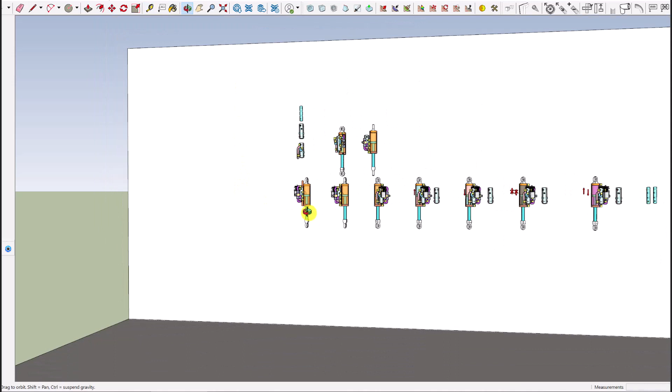This is the valve. This valve is very important because it allows creation of a hydraulic cylinder based robot, remembering that this is a hydraulic cylinder. Most people would call this a piston, but actually that's the piston, that's the hydraulic cylinder.

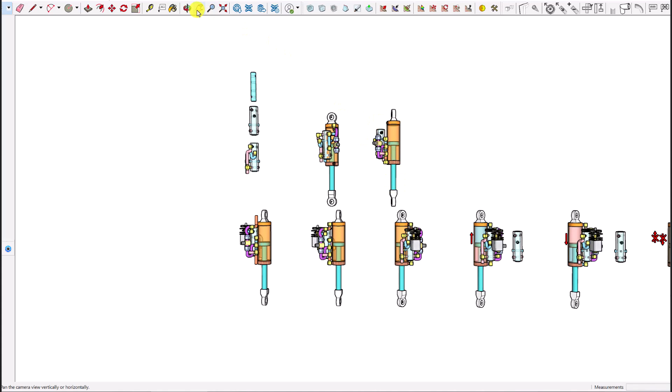I'm showing you this in SketchUp, and over here is the robot. The robot is created using hydraulic cylinders, and we went down here and looked at the hydraulic cylinder that controls dorsiflexion and plantar flexion of the foot. And here's the little valve that I put in there.

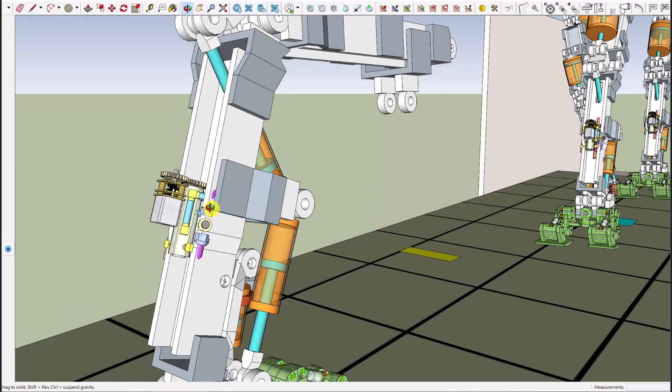Again, this valve makes possible robots based on hydraulic cylinders, which are a much better robot if you want to make a humanoid robot. The articulations are better, the stability is better, the strength is better, the way it mimics a human being is better. It's just better. It hasn't been done because no one has quite figured out how to do it yet,

but I think I'm getting there. All right, let's look at the valve.

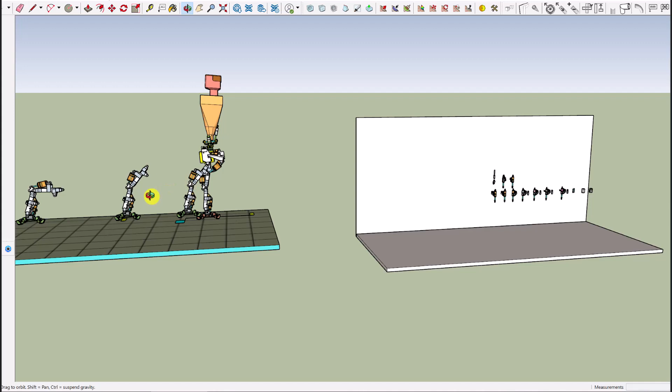What you want to do with this valve is allow you to make the hydraulic cylinder extend and retract itself. So we'll take a look at this. We'll zoom down and we'll get just this part right here.

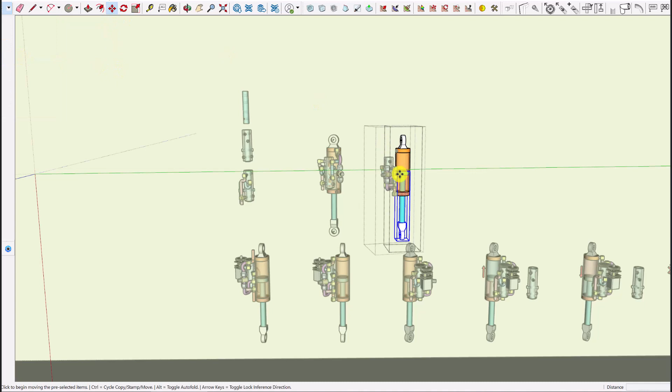And this is retraction of the piston and the connecting rod, and that's extension of the piston and connecting rod. And that's what we're talking about. We've got to be able to get this structure to do that.

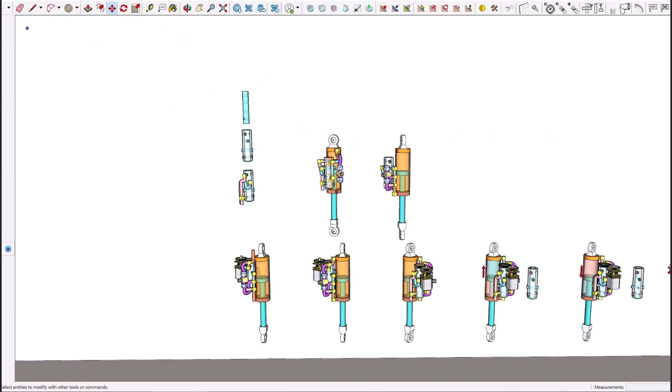The way that hydraulic cylinders work is if you put pressure up here in this chamber, I call this the upper chamber. It's only upper because this hydraulic cylinder is up and down. There's always this chamber and then there's the other chamber.

But if you put pressure here and you allow fluid to come out of here, then this piston will go that way and the piston rod will go that way. If you put pressure down here and you put low pressure or suction up here, then the hydraulic cylinder will go the other way. So let's see how this valve allows that to happen.

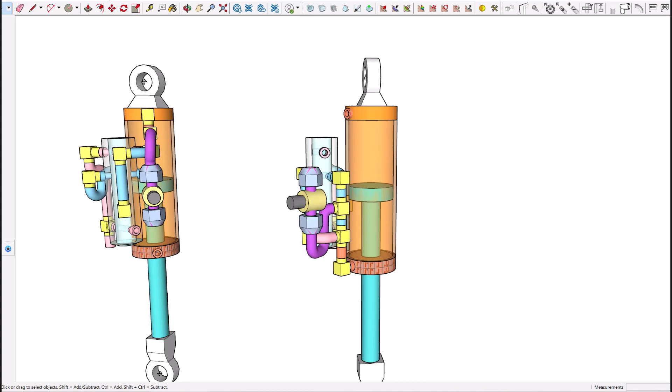Again, I shrunk it. I wanted it to be able to be used on the robot without getting in the way of everything. So it's all pushed together.

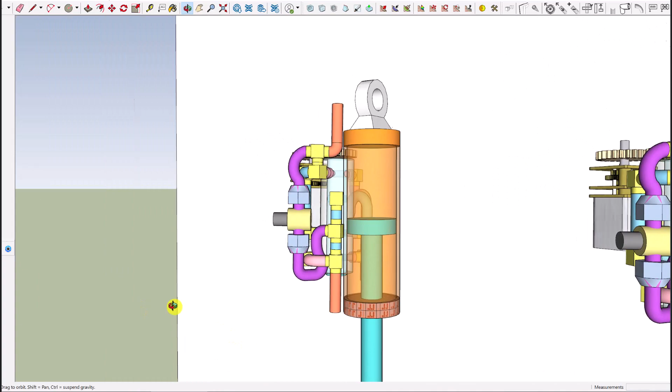Now, whenever you're using tubing, you have to have curves that don't crimp off the tubing and pinch it, or you're going to mess up the flow of the material. And because of that, you get this weird twisted around shape, but that's necessary so that you'll have smooth flow. So remember that.

I'm not doing that just to show off. And what we're going to do is, this is so pushed together that it's hard to see everything, so I'm going to take some parts off.

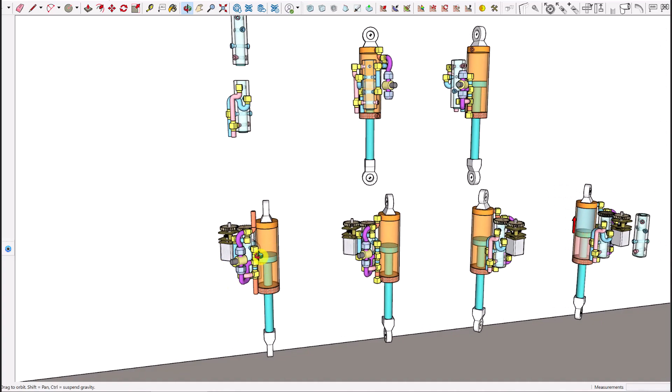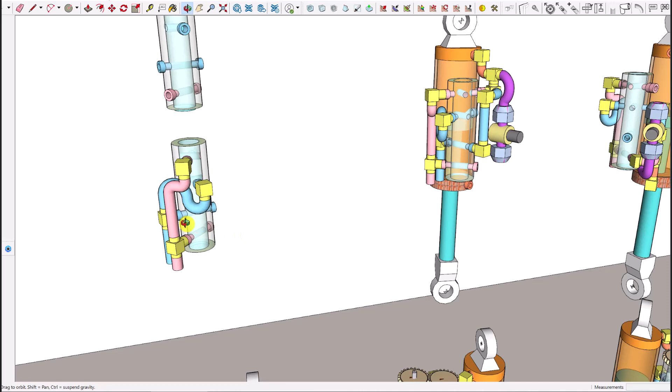This is the input system to the valve body. Pressure is red. Pressure comes to the valve body in two places. Blue is low pressure. It's not really suction, it's low pressure. It's return. So from the pump, it goes this way, and then this goes back to the pump. And you'll see that the low pressure goes to the valve body in two places.

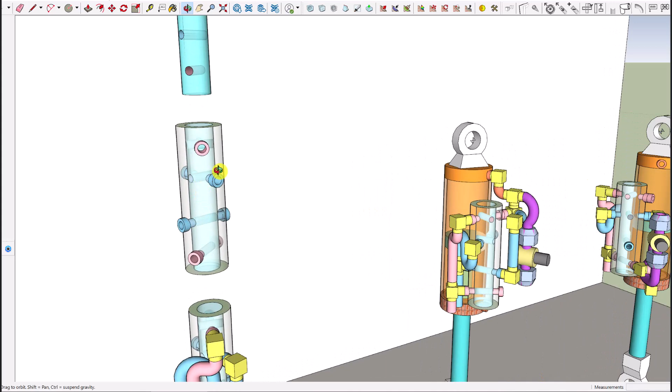And this is the valve body, and inside the valve body is the stem of the valve. And the stem of the valve has holes, passageways in it. And when the hole, the passageway, is not lined up with these ports, then fluid that's trying to come in here won't go anywhere.

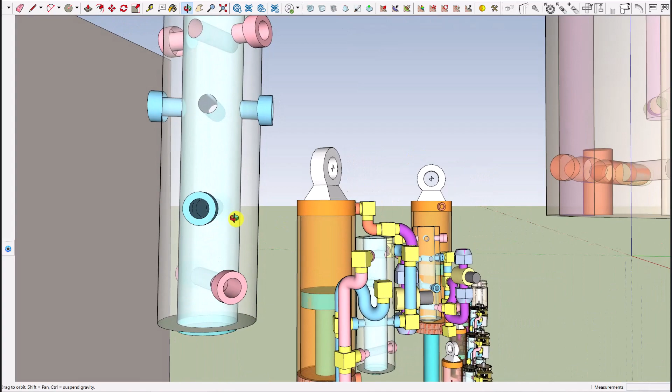Now remember, this has all been altered in its transparency so you can see through it, so you can see what's going on. The truth is it would actually be metal and it wouldn't be transparent. But you can see that this one's lined up. So if some kind of a fluid is coming into this port or coming out of this port, you could have a fluid that will go across here. So that's important. Now, let's look at what the connections are.

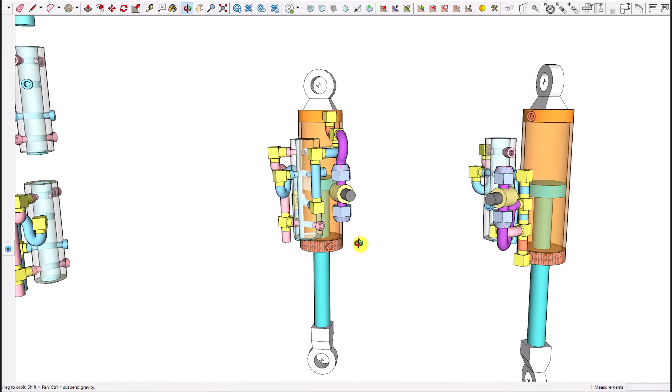I've taken some stuff off of the hydraulic cylinder, and this is the access to the upper chamber. You'll see that the upper chamber of the hydraulic cylinder is connected to the body of the valve in two places, right here and right there. And you can see that the lower chamber of the hydraulic cylinder is connected to the valve in two places, one right there and the other right there.

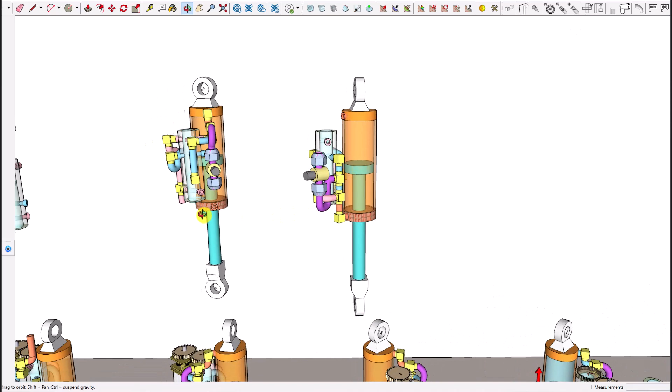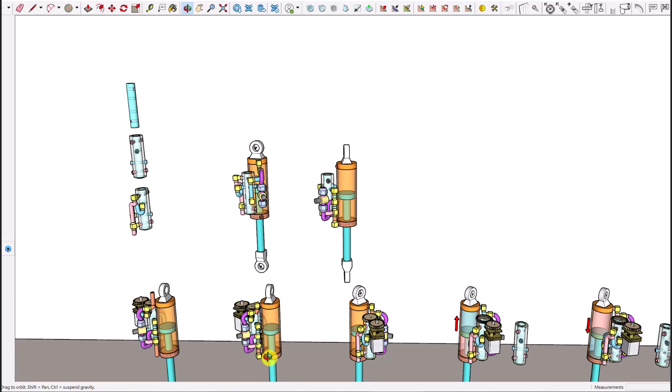What happens is the position of this valve determines what's going to happen. I have this structure right in here, this is a bypass valve. What this bypass valve does, it's a solenoid activated valve. If you open it, that takes one chamber of the hydraulic cylinder and connects it to the other chamber of the hydraulic cylinder. We're not going to get to that yet.

Now, this, you can turn the stem. That's all I'm trying to show. The drawing program doesn't want to mess with it, I don't know why, but you can turn the stem. The stem turns, the body of the valve doesn't turn.

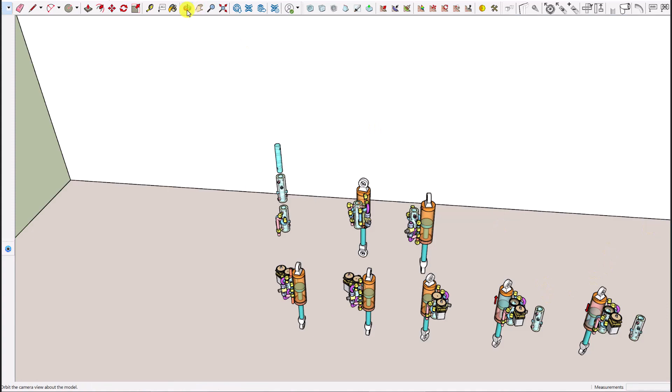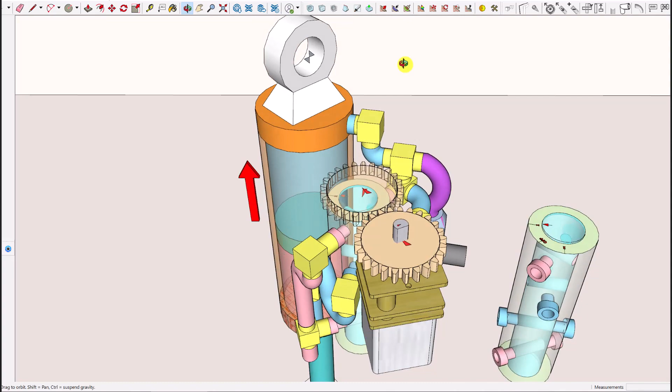So now we can go over to this particular version of the valve where I took the stem. You can see here, I put a little marker on here, and we took the stem and pointed it to position number 1. There's a little motor and gear system here turning that stem, but I made it transparent so you can see through it, and it's pointing to position number 1. When it's pointed to position number 1, the pressure comes in, it goes here, that's connected, so it goes through there, it goes also up here, but this is crosswise, so nothing flows here.

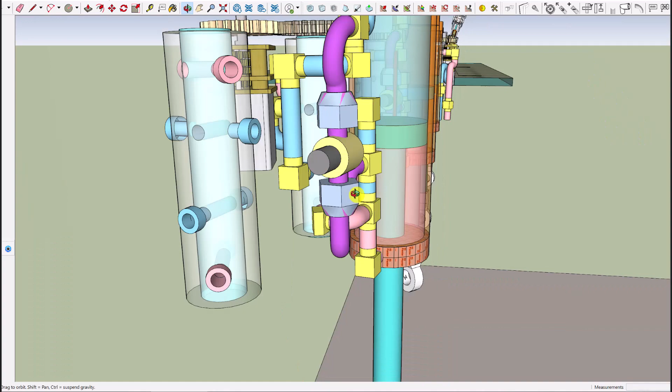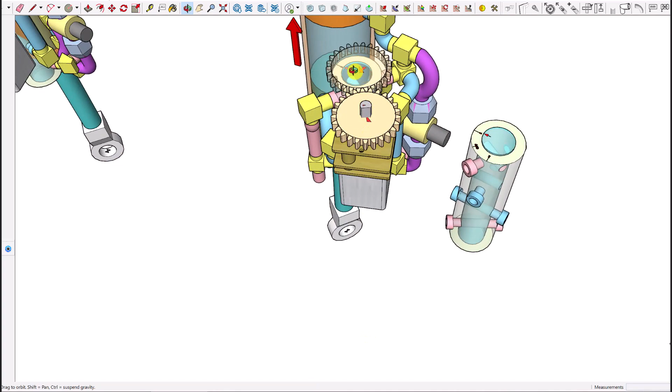And when the pressure goes through here, it goes into here, it comes into there, this goes up this way, but this is connected to a crosswise connector, so this goes nowhere, but this is connected, and the pressure goes into the lower chamber of the hydraulic cylinder. So when the stem of the valve is in position 1, the pressure is connected to the lower chamber, and by the same type of routing system, the low pressure return is connected to the upper chamber. Since the pressure is here and the low pressure is there, the hydraulic cylinder moves that way.

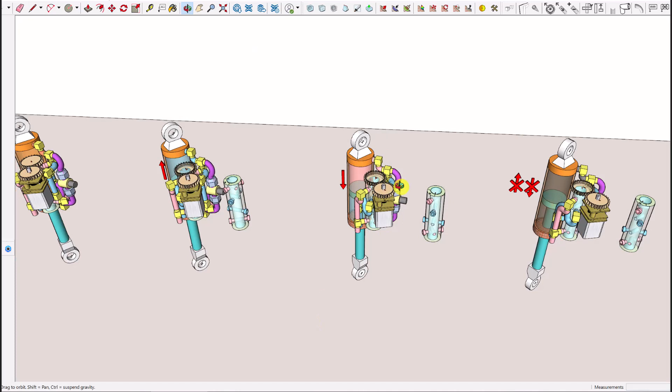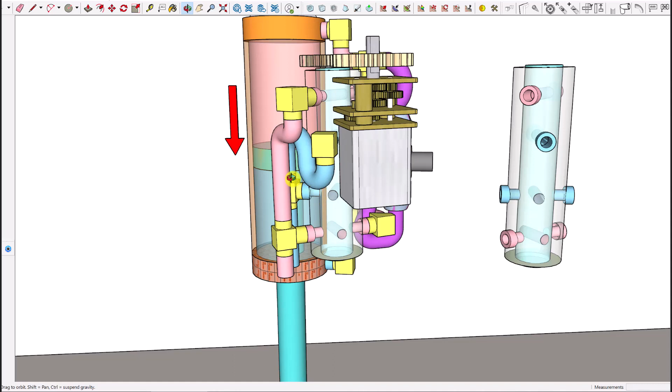In a similar manner, if you rotate the stem from the number 1 position over to the number 2 position, everything is flipped around. The pressure that was going through here is all turned off, but now the pressure can go through there, and it goes right up into here to the upper chamber. The suction that was going to here can't, but it can go through this one, and the suction is then routed down into the lower chamber. So when you put the valve in the number 2 position, you wind up with the pressure above and the low pressure below, and the hydraulic cylinder goes in the other direction.

So all you have to do to change the movement of this hydraulic cylinder is just rotate this stem.

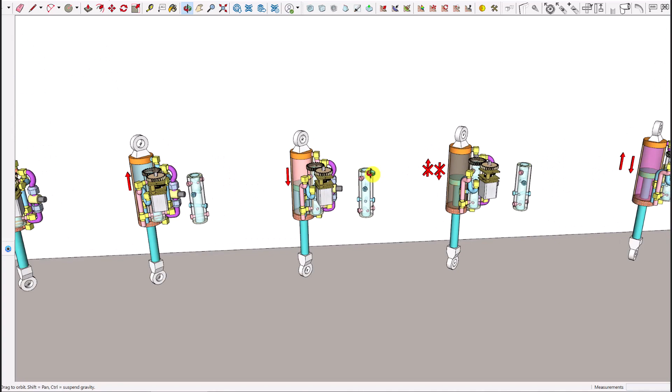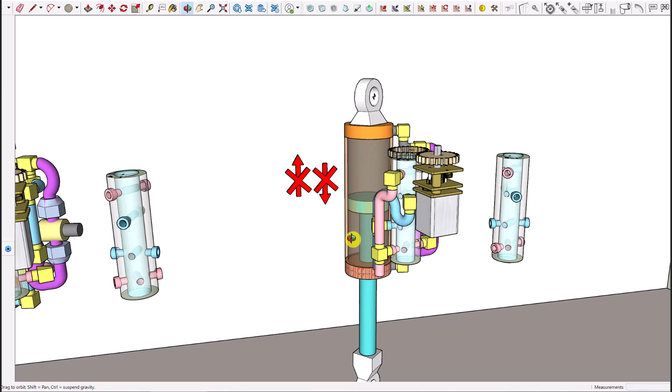What I wanted to show, there's a third position here, the off position. When it's in the off position, none of these passageways are lined up with anything, so everything is all completely blocked off. I made this sort of a darker color, a gray, like nothing's going on. So this hydraulic cylinder is locked up and won't allow any movement.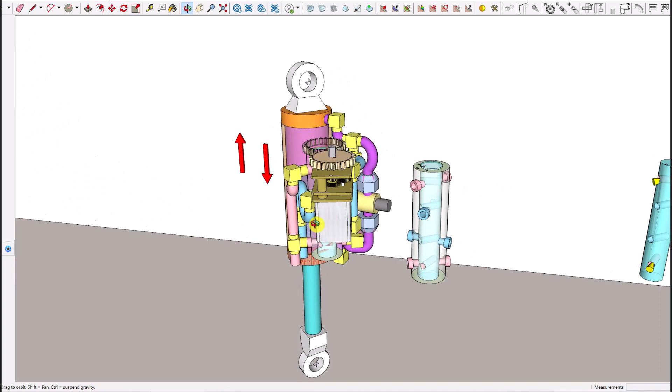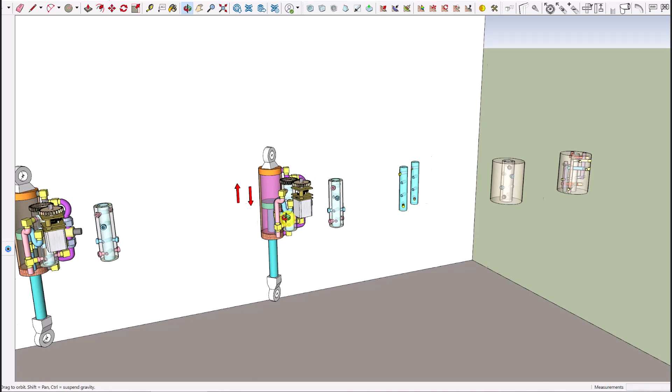Finally, I did put in here this solenoid connected on-off valve. If you open this up, so you put this stem in the off position so that the pressure and return are not affecting the hydraulic cylinder, and then you open up this valve right here, that means that the fluid here is connected to there. So whatever forces you put on this piston rod, the hydraulic cylinder will agree with you. It doesn't care, it's not under the control of the pressure and suction system. It's under the control of whatever forces are on the hydraulic cylinder.

This will allow that easy fluid motion of humans, because you can lift your leg up, pull it backwards, lean forward. As you're walking forward, you can set the pistons into this free flowing condition, and the leg that's behind will just swing forward under the influence of gravity. You don't have to pressure it forward, drive it forward, or use energy to make it come forward. You can use a gravity system, which is where that gait of human beings comes from.

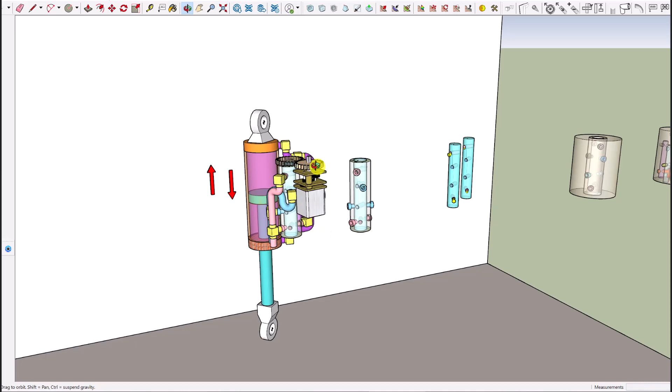And at any point, if you need to add some force to make up for the fact that gravity wasn't perfect, you just shut this bypass valve and turn the stem to wherever you want it.

The last thing I wanted to show you was this arrangement of tubes. These tubes are 1/8 inch diameter, and here's how this works. Human muscle moves at 15 centimeters per second, that's as fast as it goes, so you don't have to have this move any faster than that. The flow of fluid in this tubing needs to be at a velocity of flow less than 15 feet per second. So if this is at 15 feet per second, and this is moving at 15 centimeters per second, it allows you to calculate the smallest diameter you can have here.

And this hydraulic cylinder's size here is times 100, so it'll draw better. But it's 3 inches long and about 2 inches in diameter. So what that means is these tubes can be 1/8 inch.

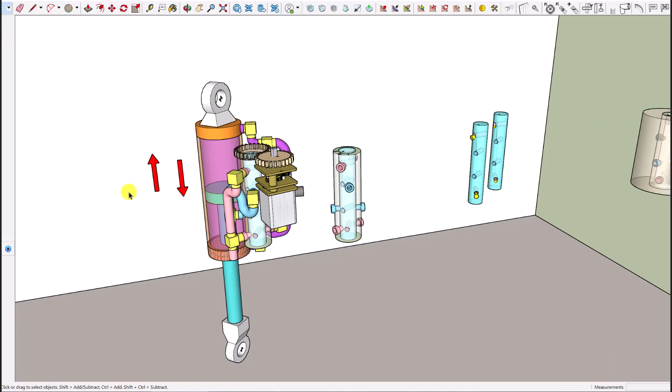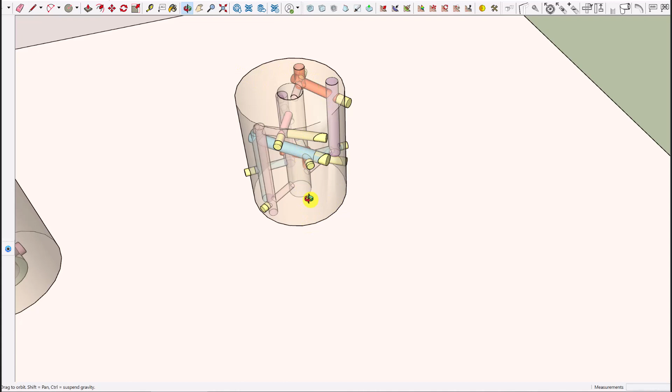And if you had a much smaller hydraulic cylinder, you could make a smaller valve, except you can't bend these tubes around much smaller than that. But you can drill holes in a solid piece of metal and then weld little plugs in place, so you can make something only a 1/2 inch long. You can make a valve that works just like this valve, except the whole entire valve is the size of a raisin. I'll get into how to do it, but I can't do that in 15 minutes.

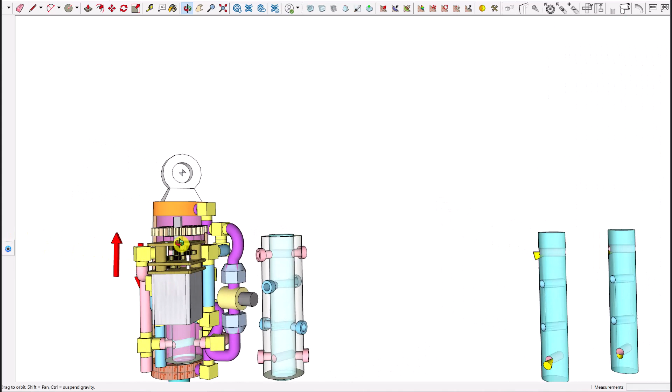And the last thing I wanted to discuss was the turn. I use this, you can buy these from Alibaba for $7 each. But this is just a motor and a gear train. There's another way to do this.

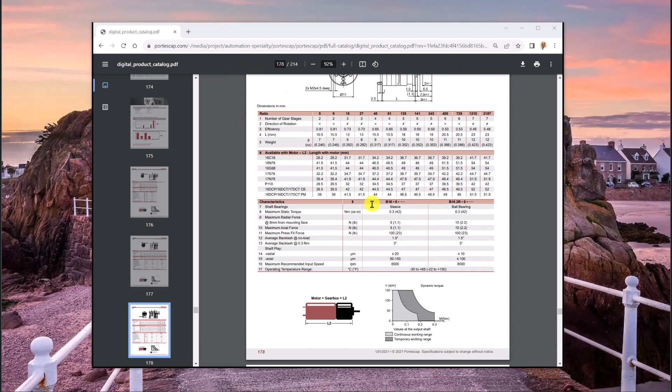There's a lot of companies like this. This is a brushless DC motor, and you can get whatever size of this motor you want. The motors can be obtained with a gear head that goes with them. This is just one company, but there's lots of them. Here is their catalog showing gear heads, what torque the gearhead can create, what motor goes with it. This combination of a gearhead and motor is digitally controlled by a digital encoding system that this company also sells for their motor.

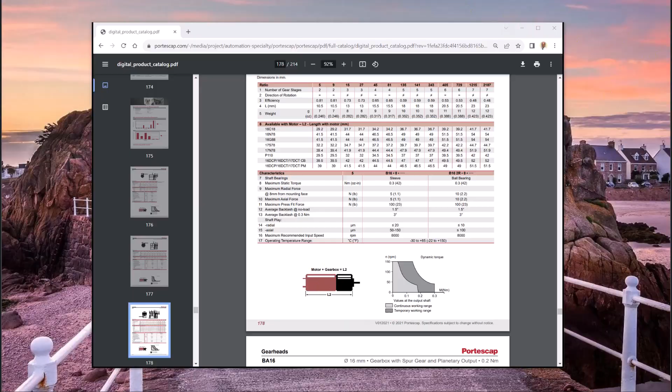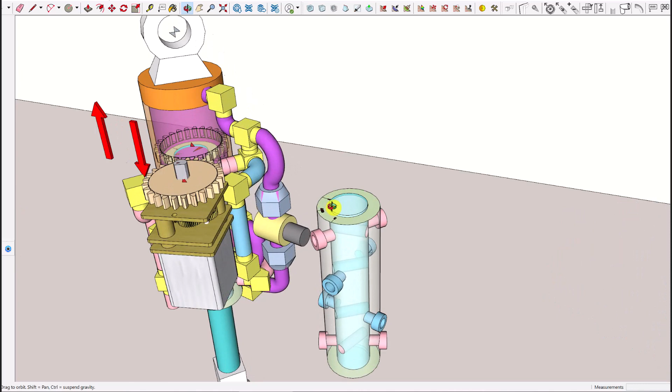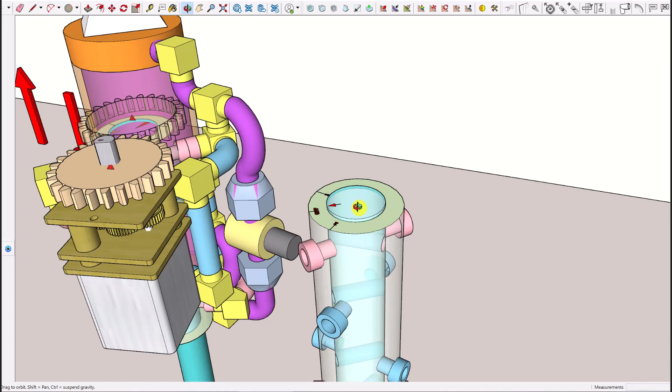We can go back to this. If you go out to the internet and they asked athletes to give maximum contraction of their muscle as fast as they could, it takes 150 milliseconds. Which means that if you want this system to duplicate a human muscle, it needs to be able to go from the off position to the number 1 position in 150 milliseconds, or from off to number 2 in 150 milliseconds. That becomes an RPM rate, and you can take this RPM rate with that digitally controlled motor and digitally controlled gearbox and get this turning at that RPM rate. It doesn't have to turn any faster than that.

All right, so that's all I can do in 15 minutes. I'll just tell you, I simply don't like having to hurry through. I've left out so much. But it does allow you to create a piston hydraulic cylinder based robot.

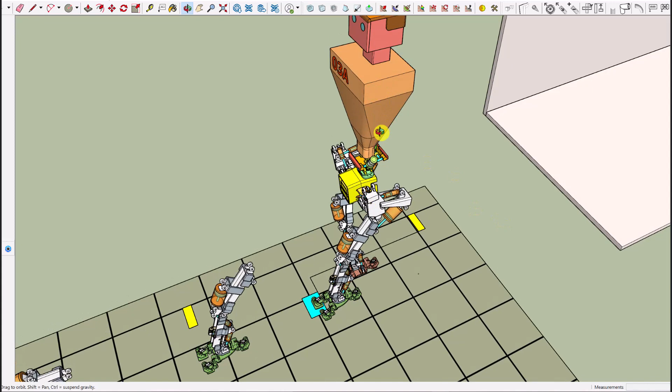And I do have one with arms on it. I created a shoulder and an arm. I'll make a YouTube where I go over everything much more slowly to show really how this is done. You do have to get the torque requirement for that stem, but that can be done, and we'll continue to show you. The little tiny valve is going to be the valve that runs the pistons that run the intrinsic muscles of the robot hand. That's another lecture I'll make for you. Anyway, thanks everybody.